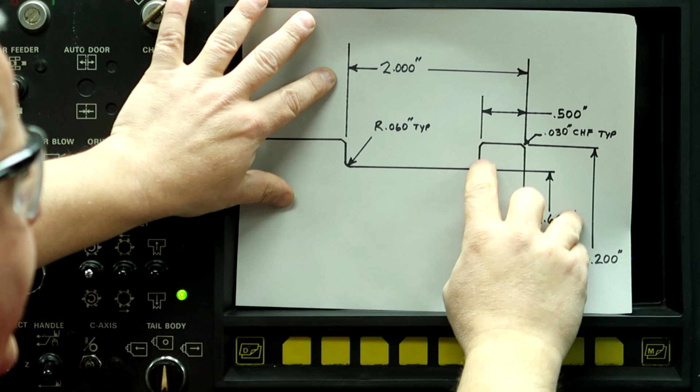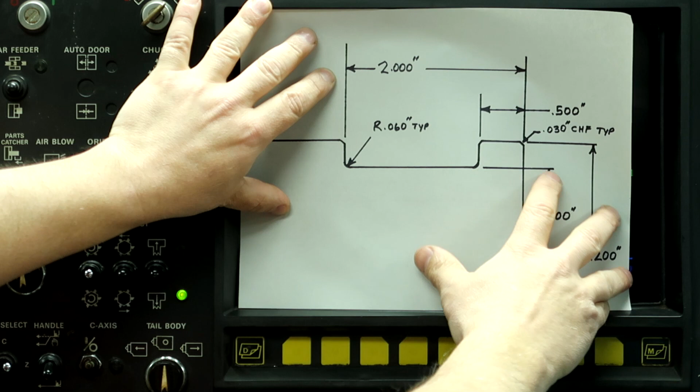And the next thing we can do, we can put a diameter all the way here with this starting point, and then it will create this geometry, but the tool will not be able to fit down into it. And because we described the tool angles in the tool data correctly, the machine will not wipe out the part. I'll show you that now.

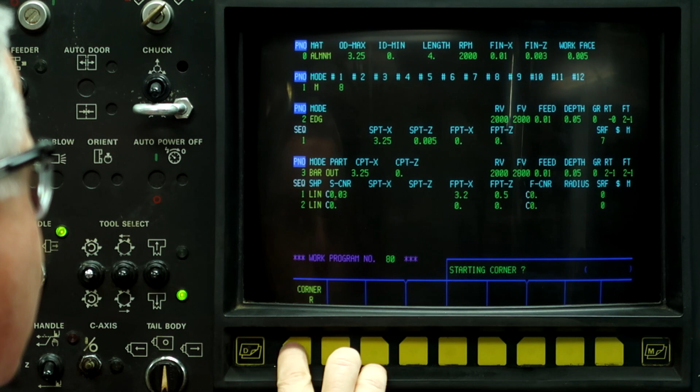So linear, we can put a starting radius. Right here is 60 thousandths. Final point on X is 2.6, and it's got a 2-inch length on it. And the final corner is a radius 0.060 thou. Forgot to put a 7 in there.

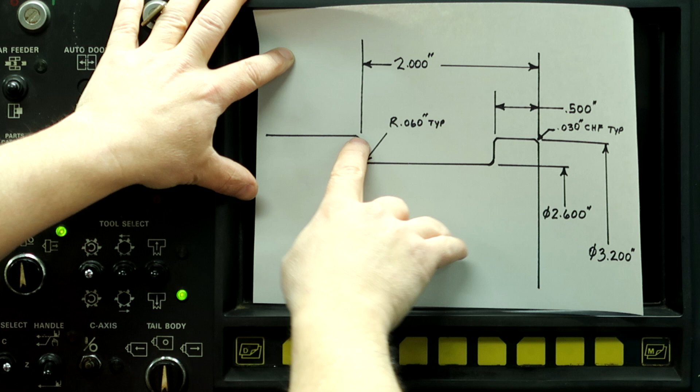Linear, and we're going to turn it back about an inch, so about 3 inches long from the front. And we're going to put a chamfer up here of 30 thousandths. So 0.030, 3.2.

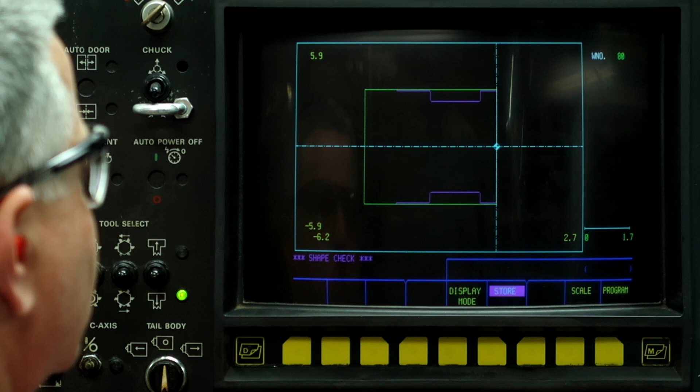And let's take a look at our figure. So now it shows exactly what we have on the drawing. We'll blow it up a little bit. So here's our drawing, here's our part.

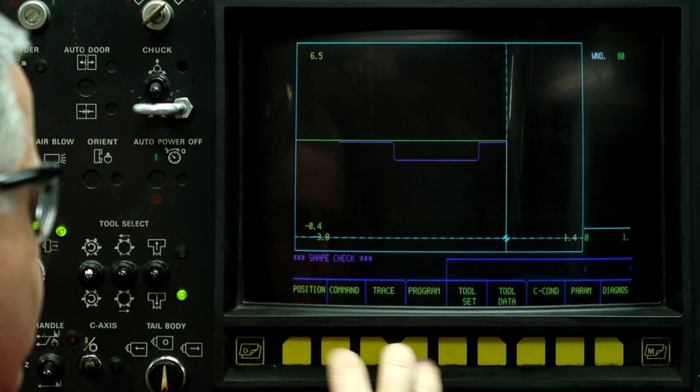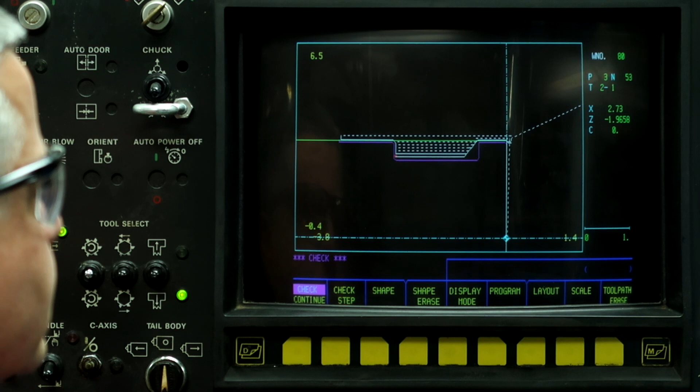But when I run the graphics, it's going to leave an uncut portion on the right-hand side of this. So program check, check continue. It's going to face the part off. And now it's going to finish the OD. But this is the area that I'm concerned about, is the non-cut area.

So what we can do, there's 2 different ways to machine this, and I'll show you that right now. Go back to program, get back into edit mode. And right here, CNR is basically corner. This shows what's going on with the uncut portion of this process.

So this one will machine the stock out of there, and I'll show you that right now, but I don't like using it because it rapids down into the workpiece. It doesn't feed down into it. I don't know if they've changed that on other programs or controllers, but on this one, it rapids down into the material regardless of how you program. So push corner, out, highlighted. That should feed down into it, but it doesn't. So out, auto with the feeds and speeds.

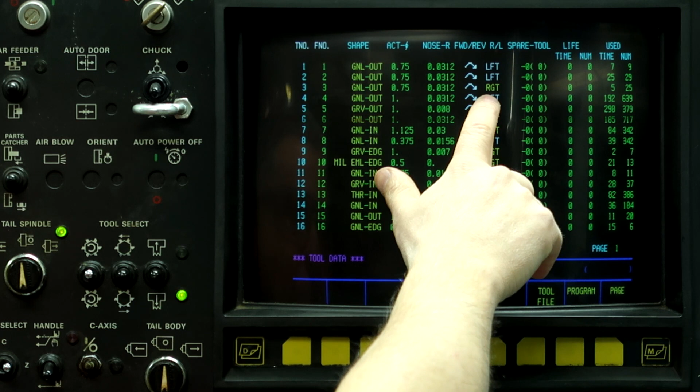And then we're going to select tool number 3, tool data. So it's a general tool with a 31 thousandths radius, and it's a right-hand tool instead of tool 2, which is a left-hand tool.

And on the tool file, they're both 93 degrees with a 35-degree angle on the insert, but because one of them is a right-hand tool, it's actually pointed to the right, and the left-hand tool is pointed to the left.

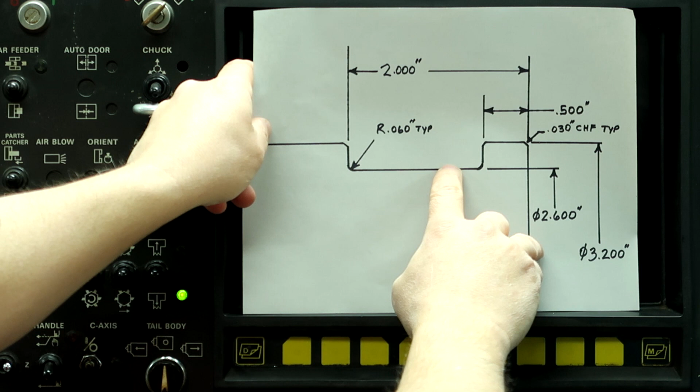So, 3-1. Now we're going to do the starting point, and on the corner it's a little different than a bar out process. For this starting point, we'll give it a starting point down here of 2.6 inches, and a starting point on Z around 800 thousandths, because of how the previous tool cut this OD.

Final point on X is going to be 3.2, because it's going to cut in this direction. And the final point on Z is going to be 500 thousandths. Then we can tell it that it has a radius here of 60 thousandths. So, push radius, 0.06.

And figure check - because it's drawing over the top of it, we're not going to actually see the corner geometry. Scale input. So now let's go ahead and run it, run the graphics again, the toolpath.

So anything that's a solid line is a feed move, feeding down into the material. Anything with a dotted line is a rapid move. Right now it's making a dotted line, which is a rapid move down into the stock.

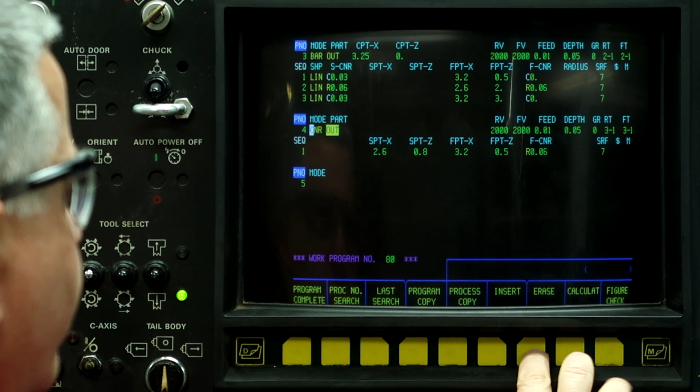So here's how I program. Program, erase. What I'll do is a bar out process - bar, not the highlighted one, but the regular one - so it rapids down into the material.

And then I'm going to put an angle at the bottom to control the lead-in when it blends to the 2.6 inch diameter. So cutting point on X is 3.2. Cutting point on Z is going to be about 0.9.

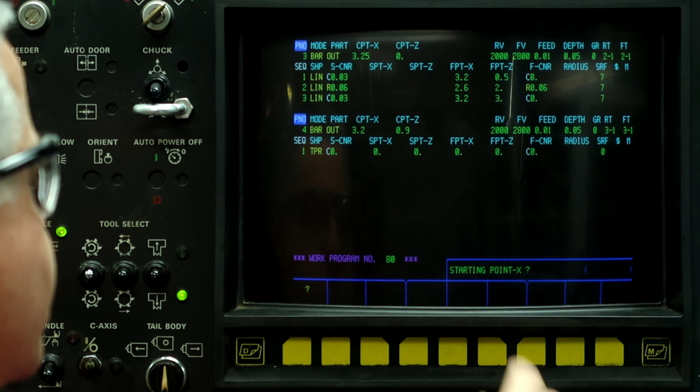Auto, 50 thou, and then I'm going to use tool 3 again. So now the first thing we're going to do is a taper. The starting point on X is 2.620. Starting point on Z is 0.9.

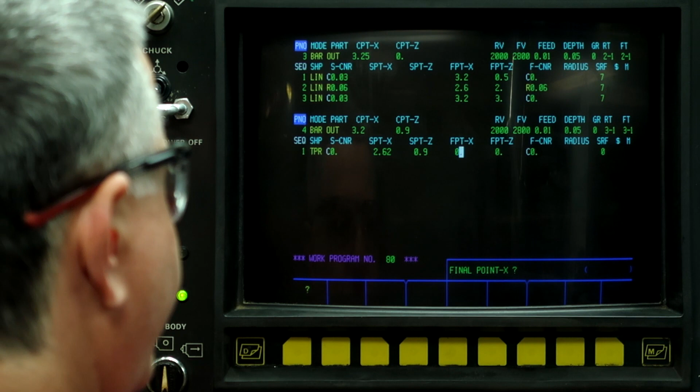And the final point on X - what I'm going to do is start here, and then I'm tapering down into this diameter, 2.6. The final point on Z, since I'm going in this direction, the Z gets smaller than my starting point.

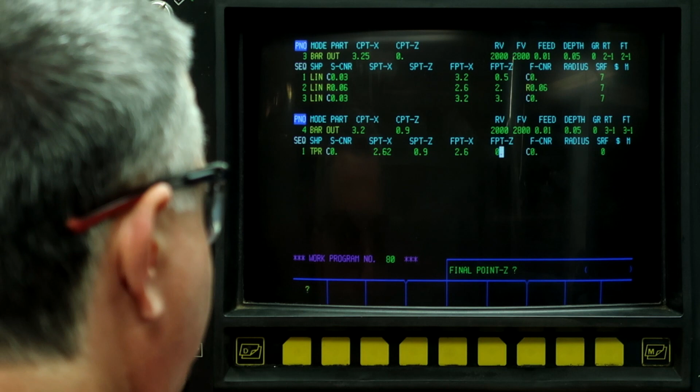Now what I'm going to do is a horizontal line here with a radius at the back of it. So linear, 2.6, 0.5, radius, 0.06.

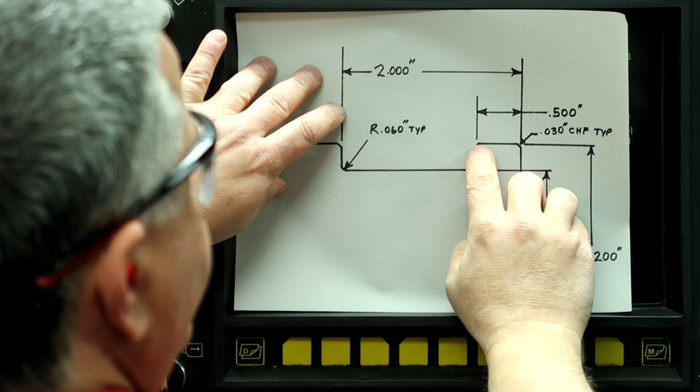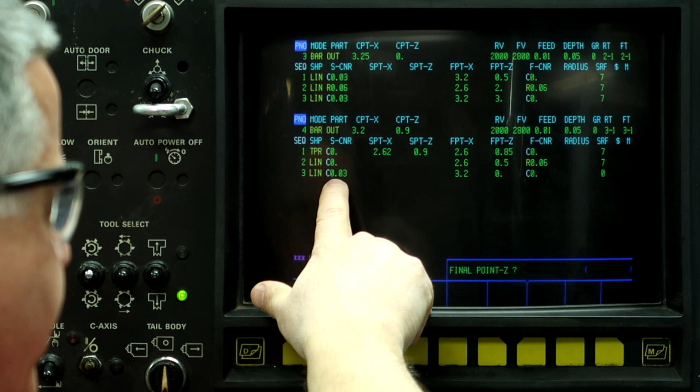Now I'm going to break this edge with the turning tool going in this direction, so we need to break that edge with 30 thousandths. So put another linear, 30 thousandths, 3.2, and then I want to go past 0.5 by 30 thousandths plus 2 thousandths - so 0.468. 7, shape end.

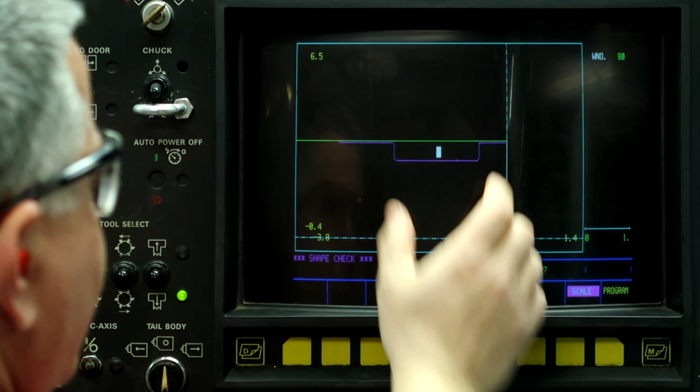So let's blow this area up, that way we have more detail. And now we can see the 2.620. Well, let's blow it up real big - so 0.1.

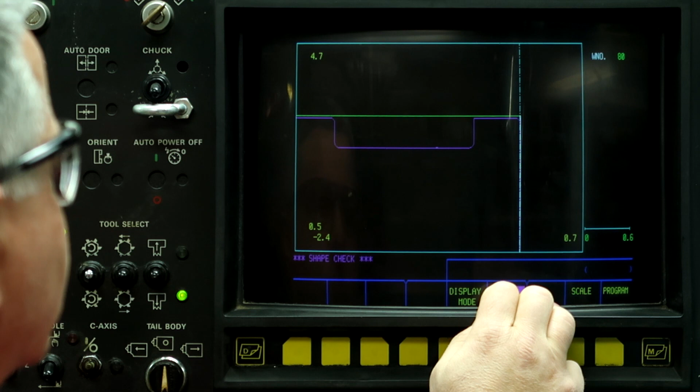So right here, here's the line where it's going to feed into it and then feed across. So scale. And then also break that edge. So program, check, check continue.

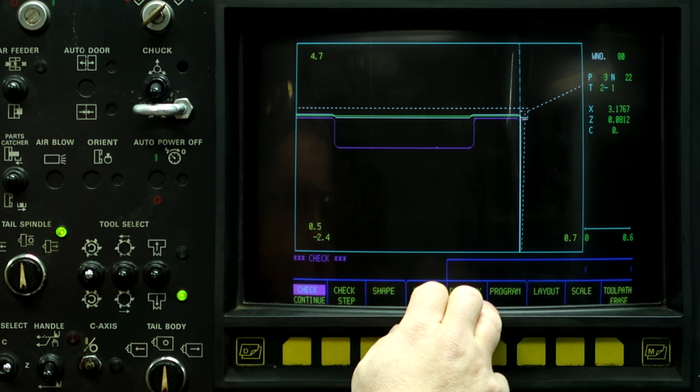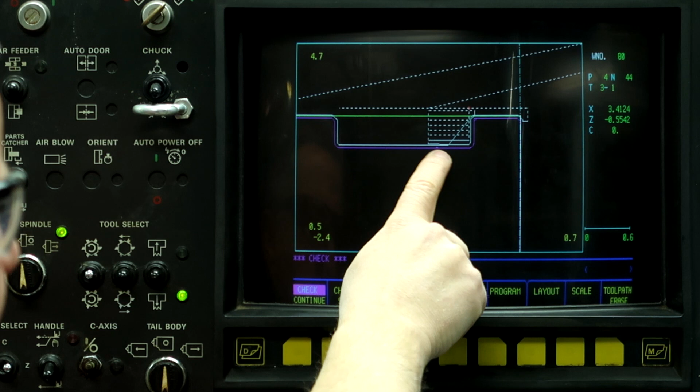So it's going to face it off with tool 2. And then I'm going to leave this particular - it's going to cut a little more air than the corner process does, but it's going to feed down into it. And here's our overlap point right here. So now it's done.

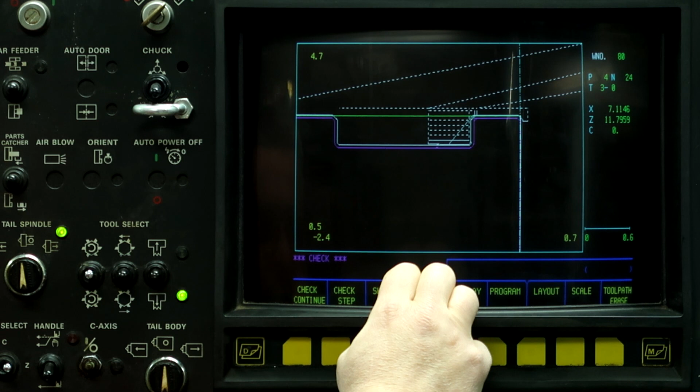Now we just need to set the work shift and then run the part. All right, let's set the work shift.

Stop. We'll clean off 5 thousandths off of that face. We'll go program, program file, Z offset teach, 0.005. That sets our work shift.

So now we need to call up the program. Go to position, auto, work number 80, and we're 5 thousandths away from our part. Our trace shows our tool 5 thousandths away from the part. So we're ready to go and run this part.

So right button, turn on the coolant, and let's go.

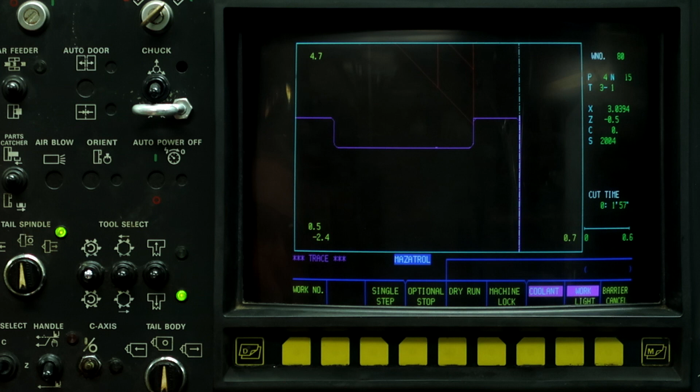Here comes tool 3. All right, now it's doing the finish pass. And we're done - 2 minutes and 1 second.

And there's our part with a square groove cut in the outside diameter with 2 separate tools.